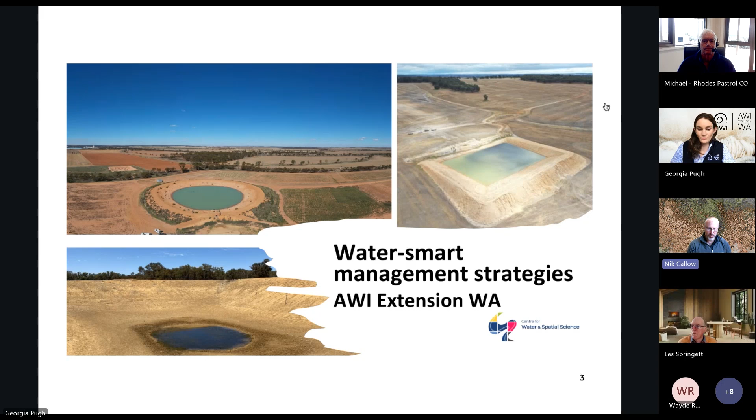So we'll see if this slide projection moves. Basically I wanted to share with you some of the lessons and experiences that we've had out of this project called WaterSmart Dams, or WaterSmart Strategies. WaterSmart Dams was a collaborative project across a whole pile of different partners, trying to use the best bits of everyone's skill set. So my team at the university handled some of the monitoring, the R&D, and building some of these water planning tools, the Grower Group Alliance liaised with some of the grower groups, and awesome people like Wayde, who were generous enough to lend us one of his dams to experiment on and host some of the demonstration sites.

And what we were really trying to do with this project is not muck around in the laboratories at the university, but build things at scale of adoption on farms in real systems, try them. Don't believe the manufacturer's numbers, because none of our numbers looked anything like what the manufacturers say things do in the field. So that's a useful lesson, but probably not that surprising to anyone.

We also had other parts of this program that people may be interested in finding more information about, which we call the broader WaterSmart Farms. So this bit is the Smart Dams component, but there was also another component looking at improving groundwater targeting and also micro on-farm desalination. And there's some good resources that you can find on some of that.

And I guess if there's one thing to say about some of the things I'm going to talk about today, they might be right for some people and might be water security options that are right for your farm business, but they won't be right for everyone. It's about looking at the nature of your business, how much water you need, what sort of qualities of water you need, your appetite for risk, your appetite for capital expenditure, and then coming to some conclusions. So that micro on-farm desalination stuff is another really nice part of the puzzle.

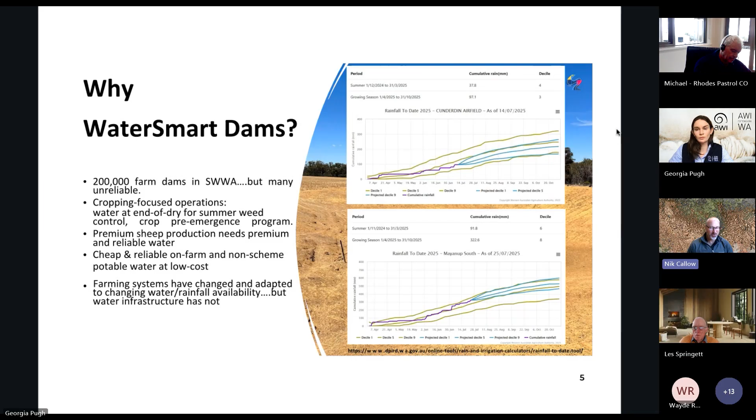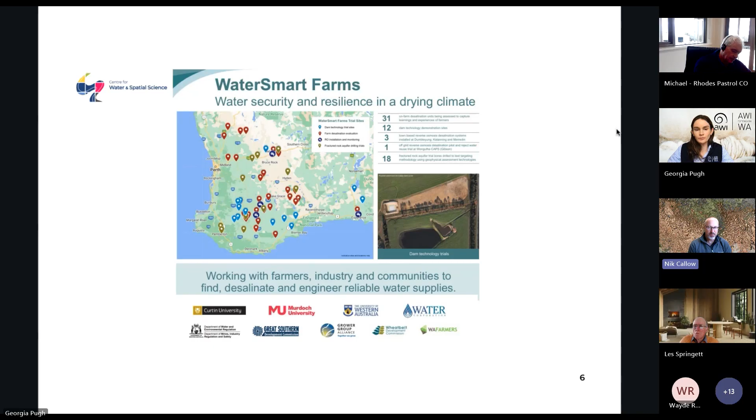There's a whole series of demonstration sites that were developed, and you can find more information if you're interested - look for the WaterSmart Dams project or WaterSmart Farms. Again, a whole pile of partners, things at scale, and a whole pile of really fantastic hosts who trialled different sorts of technologies.

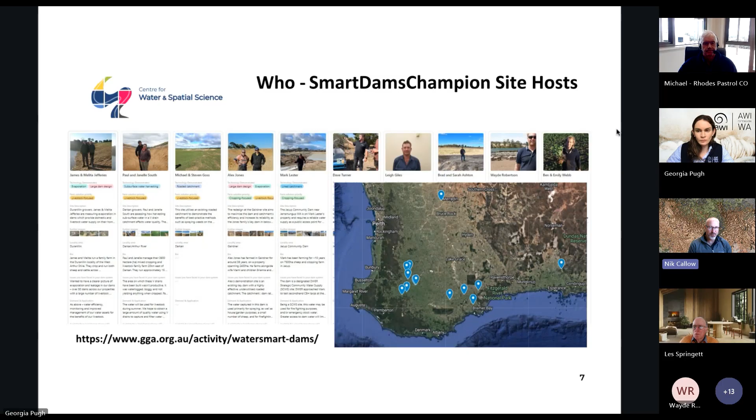We've got Wayde, who'll maybe share his thoughts on the floating cover he tried on his property. Really sort of learning those lessons together, which is what great projects are about, and also making sure things work - it's not just people dreaming up ideas and suggesting they're great when they just don't actually work.

So when we talk about water, we sort of break it into 4 key components: a focus on more runoff, so getting more water into dams; keeping the water in the dams; and a little bit of a focus on water quality, which we think is a really important part of the puzzle that maybe people aren't thinking about or valuing.

If you're shifting and evolving your business to looking at prime, high quality livestock production, that sort of system is going to work better, and you're going to get enhanced weight gain and productivity benefits from using higher quality water. That's a really key message - not just valuing that I've got some water on my property.

We see people who are sitting there at the end of, say, trying to get their pre-emergent program in - they're just relying on all the carryover water they've got on the farm, but they're using really specific, high cost chemicals as part of a mixed farming operation. Equally, livestock just hanging on to the last bits of water, it's not going to be good for them. So the right quality of water is an important part of the puzzle - it's not just a quantity story.

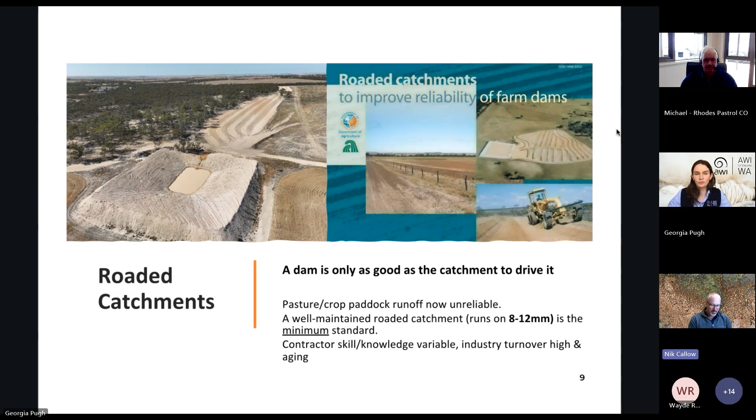Getting this water infrastructure built, laying your hands on well-trained contractors who can do this work, or people who are doing it themselves. We have lost a lot of people out of the industry. They've tended to go and operate machinery in the mining industry, which is a challenge. So we really need better design, but a strong focus or better focus on getting that catchment component working.

Also trialled some more novel methods. So this one was a repurposed grain tarpaulin. These were trying to target much lower thresholds of rainfall. The roaded catchment I was just talking about is that 8 to 12 millimetre per day to trigger runoff. Whereas this one here, site down near Jacup along the south coast of WA, starts to run after about 0.8 of a millimetre.

We had another one that we trialled in association with SEPWA out near Esperance, and again about that millimetre of rainfall. And what's really significant here is being able to capture this additional rainfall. A huge amount of our rainfall is those small to medium rainfall days where we might get 5 to 10 mils of rain, keeps the crops ticking along. But from a runoff perspective, in a conventional farming system, you don't really capture much runoff. You're just waiting for those 15, 20, 25 mil in a day rainfall events. And sometimes they just don't come along.

So the site that we ran at Esperance, I think the highest rainfall day that they had over the 2 years we were running there was about 18 mils. So a conventional system relying on runoff from paddocks, zero runoff, zero water, whereas these high-performing catchments are one way to run. You don't have to necessarily go with this technology. We'd also steer people, rather than going for the repurposed tarps, to dedicated surfaces. Obviously they've got to be well fenced out. You've got to keep the livestock off them to optimise the life.

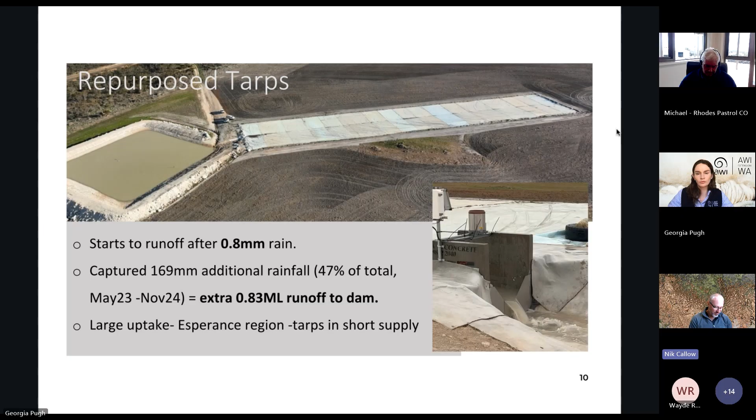And there are some significant costs, but we have seen examples of people adopting these, building fully lined catchments into fully lined dams, and then they're operating with pure rainwater. And their comment is that it's not necessarily just a water quantity game. Their performance in crop spray, in herbicide resistance, in ryegrass knockdown is totally transformative to their business. So using water that's never touched a grain of dirt, pure tap water, which is exactly what those chemicals have been developed in laboratories to use, has been a key part of how they've evolved their thinking about water security on the farming operation.

So here's the example at the Wandell's property out near Mount Ridley, about an hour east and north of Esperance. You can see here the proportion of rainfall. With the conventional system, 0% of the rainfall would have been captured from 25 mil. Roaded catchments, you're capturing somewhere in the order of 20 to 30% of the rainfall. Then you've also got to factor in the actual runoff coefficient is only about 30, 40, 50% of that rainfall. So if you've got 200 or 300 mils of annual rainfall, you're turning 10 to 15% of that into runoff on those sorts of systems.

Whereas the high performing systems, you can see the stats at that site, are capturing somewhere in the order of about 85% of the rainfall, much higher runoff coefficient as well. So they're a really good option that might be part of a solution for some people.

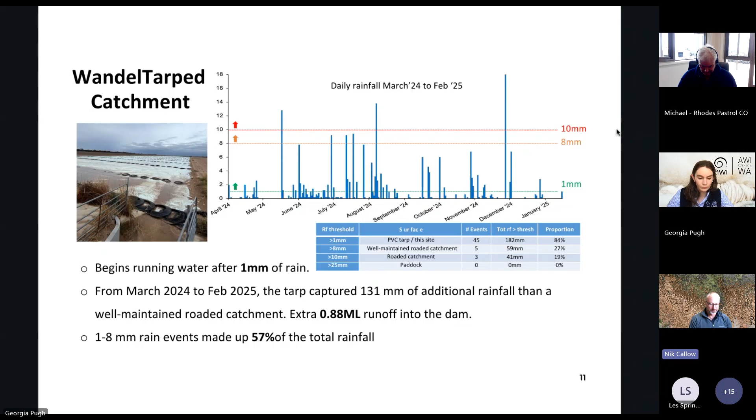This is one of the other trials that we ran with the Gosses down near Darkan area. So we had a look at some different road catchments here, some treatments here. So just like, you know, cleaning them up, getting rid of the weeds, giving them a bit of a roll, just tweaking and improving those runoff coefficients. Again, just slightly more performance out of those.

So again, these sorts of systems, just really getting them dialed in, getting them working as best you can, just capturing as much water as you can. So just emphasising, road catchments are great, but don't put them in and just forget about them for 10 or 15 years. They do need regular maintenance, and regular maintenance keeps them working in a much better sort of window and capturing more runoff. So it's really, really important to keep up to date with that.

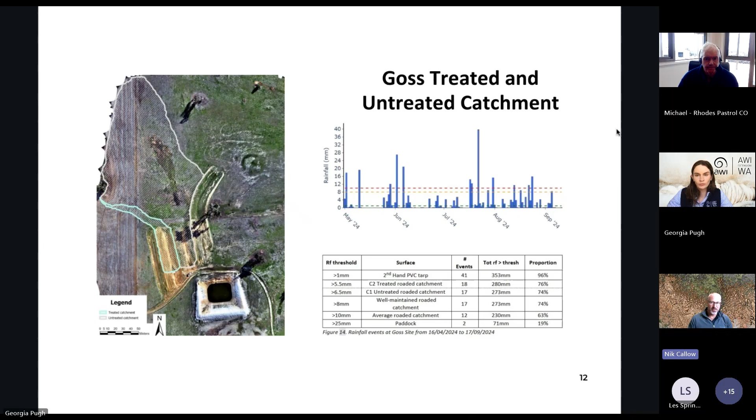Whoops, I'm going to advance slides with my keyboard again.

One of the other ones we looked at was subsurface drainage. So the idea here is some of the properties in the higher rainfall zones, some of the areas which are running much more intensive livestock or mixed farming operations. These areas particularly, so this was near Kojonup in these classic kind of duplex soils, really bad waterlogging problems. The fella here that hosted the site, Brad Ashton, couldn't really access a major part of his paddock. And so he was pretty keen on the subsurface drainage.

And what we were interested to do is try and just, can we take all of that water out of the paddock? And what sort of quality are we actually dealing with? And we were quite impressed, so we're deliberately quite high in the landscape here. We're definitely not doing this in low-lying areas, and no evidence of salt on the surface. But in this case, his drain had better drinking water in terms of salinity than my tap water in Perth. So that was a really good sign, really high quality water.

We are going to do a little bit of follow-up testing, hopefully this year. We've got a couple of sites that are starting to run off because we've had some good rains. So we do want to do a little bit of nutrient testing out of these, just to double check that we're not capturing a whole pile of nitrates and things like that in the water that might have some downstream effects on the system, particularly on livestock focused operations. So that's one of the things that we just want to track.

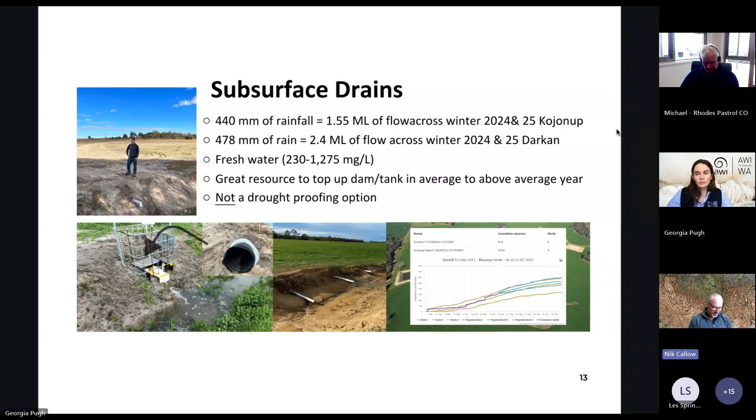Next one, we want to look at keeping water in dams and doing some work there, and included a bit of benchmarking. So just, how much water is being lost from dams due to evaporation and leakage. And basically across the sites, we looked at some different locations. But yeah, in the order of just over 1.5 metres of water being lost from the dams to evaporation, and then the leakage rates that we were seeing were in the order of maybe 0.5 metre through to 1 metre. So it's obviously very site dependent.

We did do some trials of some leakage polymers that are added to dams to try and clog them up. Unfortunately, the sheep decided to impact our monitoring and wrap all the water loggers around their feet and pull them out of the water, which didn't really help things.

So I can't really report back on the numbers from that. But yeah, anecdotally, it sort of seems to have had an impact. And some of the small amounts of data, which I don't really have enough confidence to present, do suggest that they had a significant effect.

When we look at the cost-benefit economics of water, actually treating leaky dams is pretty much the single cheapest way to get water. So maybe in the order of like 50 cents to $1 a kilolitre, which is certainly a hell of a lot cheaper than buying it and carting it from the scheme.

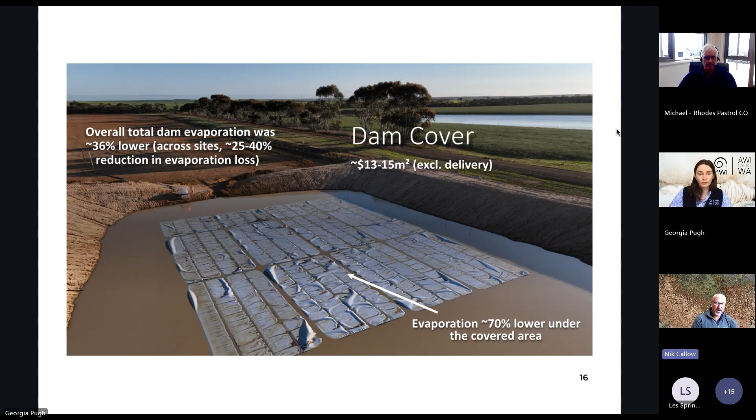And so by the time that you work out you can't cover the whole dam, you need them in the water, otherwise they can be susceptible to blowing up. So, most of the sites we were seeing somewhere in the order of a 25 to 40% reduction in evaporation, but that can be really quite significant, and that can be the difference between having and running out of water. Cost there, about $13 to $15 a square metre is what we paid for the trials.

This is Wayde's little wee dam. So we put out this about 180 square metre cover. It's about a 1.94 megalitre dam. You can see some of the results I've got there on the left hand side. So basically we've done some of the localized monitoring. We've also used regional weather stations and built some models of the evaporation processes, and then that allows us to investigate the difference with a cover and without the cover, and quantify these.

What does this mean overall? So if you look at it across the full year at this particular dam on this particular property, we've gone under the uncovered scenario of having in the order of... sorry, I've lost my place. So we've reduced the total evaporation pretty significantly. Really, if we look at that scenario, if we got that dam to 100% full, by the end of the following dry season we'd have a good couple of 100 kilolitres of extra water within that system.

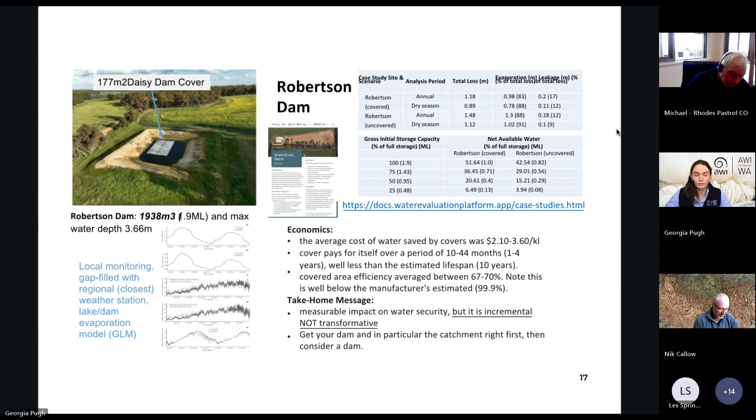Just sort of go through. So one of the other things we looked at was also just evaporation from vegetation-covered dams. So they can offer a whole pile of benefits. So, a lot of vegetation filtering of the inflows, much higher water quality. In this case, the evaporative losses are around about 28 to 32% less, and that's a story of reducing the wind across the dam. So they remain a really good option.

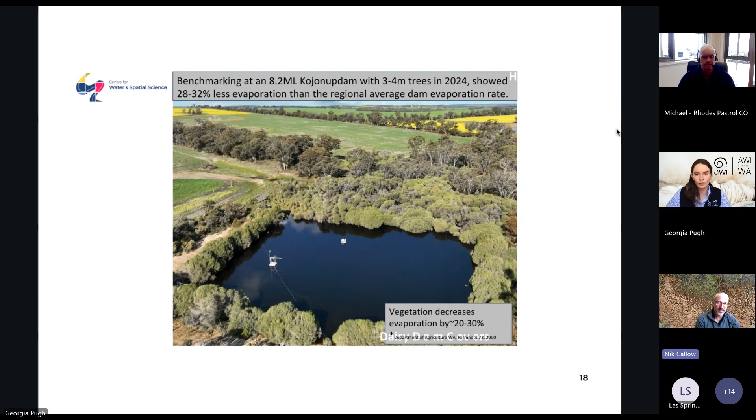Seems to be still a lot of hesitancy about integrating vegetation in dams. Certainly this one, the leakage rates were incredibly low. It's a really nice dam site on some really nice sort of clay that's really well sealed. But the combination of all of those paperbarks around that dam were really effective in being a pretty low cost way to keep some more water in the system.

The last one I'll sort of flag pretty quickly is just some of the water quality sampling. So we did some of this work to just get a sense of what sort of water qualities are out there, looked at sort of bore water, dam water, rainwater, but also scheme water. This one was more focused. This was work that we did more around the Merredin area, and obviously people that are maybe a little bit more cropping focused in that neck of the woods.

But one of the things there, for example, was, from a cropping and spraying perspective, pH is pretty important on various sprays. So say, for example, glyphosate is a weak acid. It doesn't want a really alkaline base water to start with. But for example, the scheme water in some of the areas that we sampled, where we've got water sitting around either in concrete pipes or in some cases on farms in concrete tanks for long periods of time.

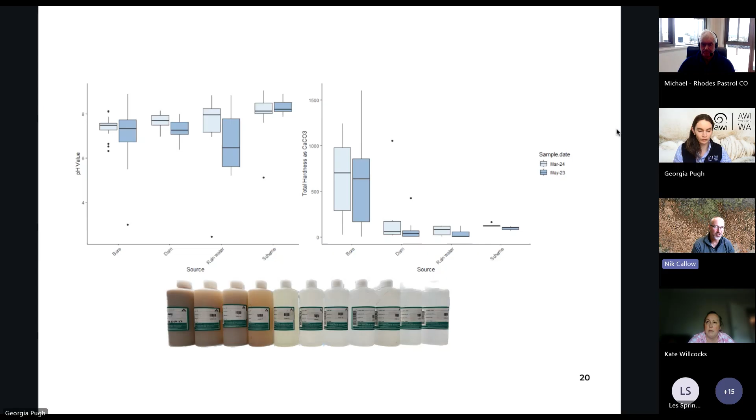So you want to be a little bit careful with some of that, and obviously doing a lot of water quality measurements before you put that 99% of what goes into your spray tank in. That's an important part of what gets used in that system. And equally, these base parameters, salinity and those sorts of things for livestock, and/or considering things like strategies to reduce the E. coli load and things like that.

A little sort of shout out to one of the things that some of the researchers have been working on here that we're also keen on. So this was some work that we did using artificial intelligence and satellites. So this was tried on the Kojonup local government area. So we're actually going into satellites and measuring farm water supply, or sort of the total area of farm dams, and we show some really good data in terms of being able to track regional water trends and things like that.

So we're really keen to sort of be able to do that, to maybe provide that as a bit of a tool, one, to people on farms to understand these more multi-year sorts of trends that we're seeing, and where you're standing with water quantity, although I think most people have got a pretty good understanding of that, but also being maybe able to feed that better into the policy space,

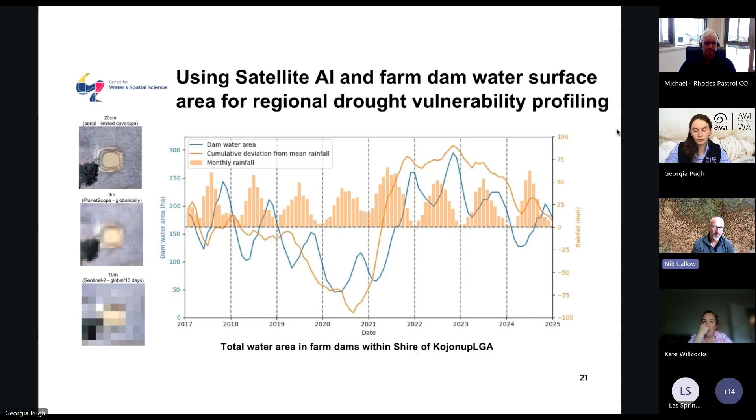to really emphasise some of these particular times when we do require government and policymakers to be probably a little bit more organised and ahead of the game, where we're better able to see some of these challenging seasons coming, and to be maybe slightly better equipped to not just be reactive, but to be a bit more proactive with some of these things.

Last one is this sort of pulling it all together. So this thing that we call the Water Evaluation Platform, or WEP. And that was about trying to pull a lot of the science and the understanding together into a single platform. So it was really based on a lot of the science that we did. It is there to predict water and water security, allows people to build a system around their own dam and farm,

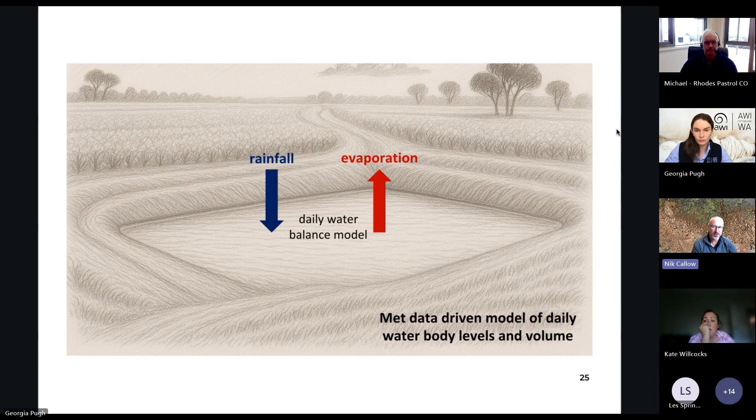and so things like how many livestock you're trying to support, or spraying, or other sorts of applications, whether you've got an existing dam and you're trying to find an optimal catchment size, or you're trying to design both from scratch. So there's a range of analysis tools within that we've tried to put together. It's based on this pretty simple water balance model that pulls in gridded meteorological data specific for your property. So you click on that and it pulls in the daily data. It looks at rainfall and evaporation.

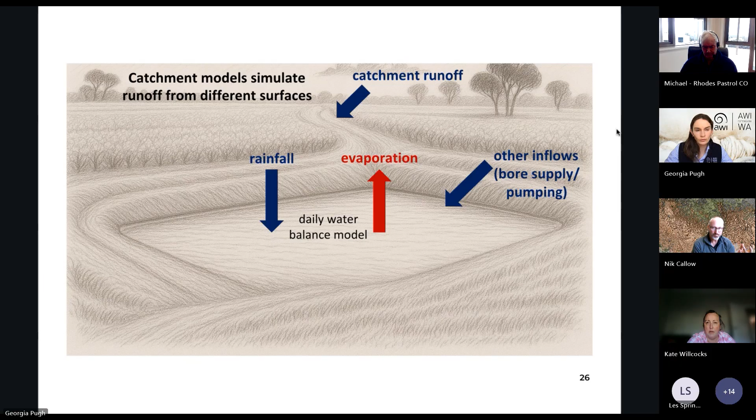It's got different sorts of catchments, and you can build multiple catchments within that, or even factoring if you're transferring water between the farm to some key dams and supporting them. And then it's got these demand functions, putting in things like, I'm trying to spray this many hectares at this many litres per hectare, or my specific livestock demand.

For the livestock demand, it actually pulls in the real climatology on the best available figures that we've got. You can also go in and customise a lot of these settings if you've got a better understanding of the demand that you've got, or other figures, you can customise a lot of those things.

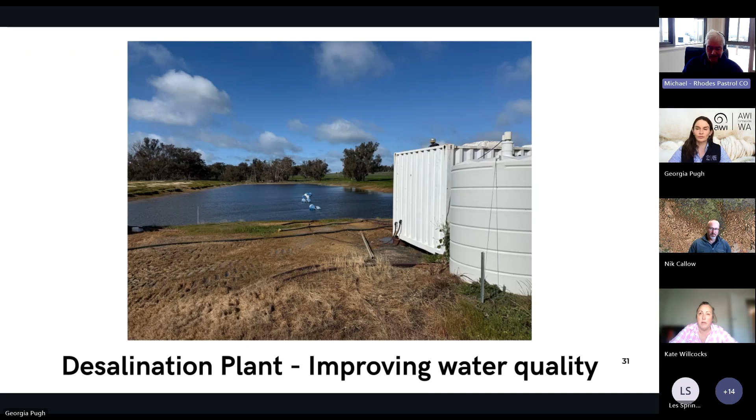17 years ago we built a desalination plant, in a sea container, bespoke, costing 350 grand to build. We can pick it up and shift it. It does between 30 and 40,000 litres of beautiful water, better than the Perth water Nick's drinking every day, when we run it for 12 hours. It's run by a 47 kVA generator. It's a pretty funky bit of kit, with a lot of computers. It's air conditioned, reverse osmosis basically.

That's really got us through some tough times, 10-12 years ago, when we were getting low on stock water, before we decided to do something about it and improve our dam systems and situation at Rhodes Pastoral. We were able to finish our lambs, cart water to cattle, or push water up to my wife's garden, which is pretty important.

This was built by a bloke - I won't say his name, but he's very good. He puts desalination units into boats, he's a really good operator. We thought long and hard about how to do it, and we can pick the whole system up and move it around if we have to, but it's basically been sat on that dam.

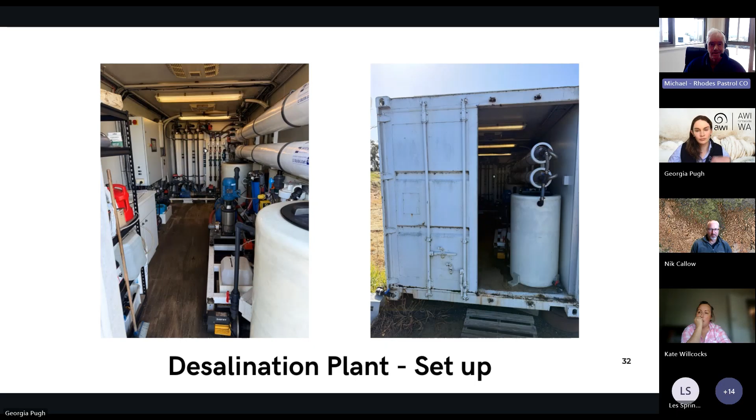I'll just go back to my pointer, that's just gone to sleep. Move. Oh. Go back.

Stock water is a really important thing, and you've got to have good clean water and good access to it. We spend a fair bit of time in our catchments each year. A lot of when we're spraying fire breaks, we make sure the guys are tidying up any roaded catchments that need cleaning. We've actually, over the last few years, realising that with the rainfall dropping off a bit, we've had to extend some of our catchments another 4 or 500 metres to keep those dams full too. So using a good contractor, someone who's au fait with fall of water.

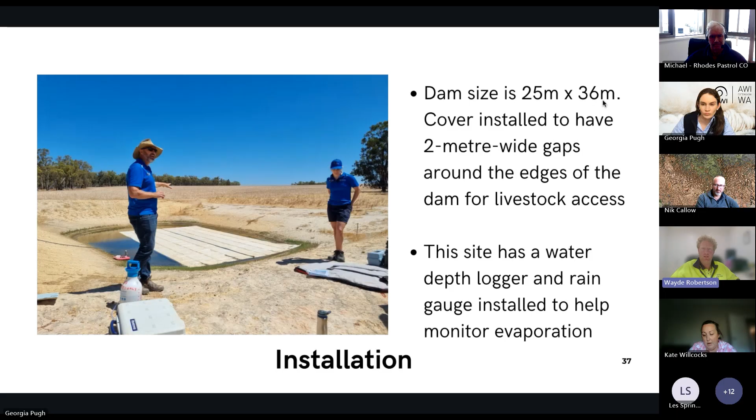So there's a few more photos of the cover when we installed it. Water quality wise, it's middle of the road, I think. Salt wise, it's very good, nothing special in there. Obviously with more and more crop in the paddock, we're finding a lot less runoff down into the dam.

I see the cover as very beneficial for a number of our dams. I think the bigger dams would be a bit tricky to manhandle and get the cover on. When we put this on, we had three of us there and it was quite easy, but a really big cover would certainly be a lot more tricky. I think it's a quick, easy solution. Cost-wise it's not too expensive, and you have the potential to pack it up and move it to another dam if you'd like.

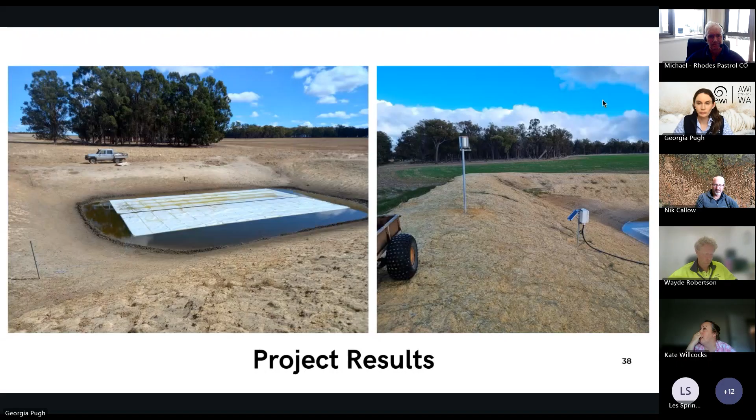So that's the cover for us. Going on a bit from what Nick was saying about subsurface drainage, we've done a little bit ourselves. We had a part in this WaterSmart Dams program, some stuff at Ben Webb's and, as Nick was saying, Brad Ashton's. So we've done a little bit ourselves, and we played around with a few different types of drains.

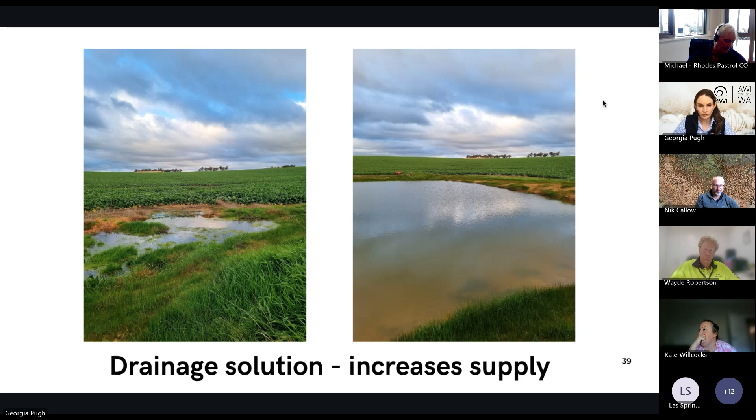This photo shows an end view of the trench coming out into an open drain. The photo on the left shows where the trench is. This area would never grow much, even in an average year - it would just get very waterlogged and always struggle. That's just a basic 300 mil wide trench with the gravel in it.

The interesting thing for us will be seeing how long these trenches last, whether they silt up over time and need to be replaced, and how long the piped ones will last as well.

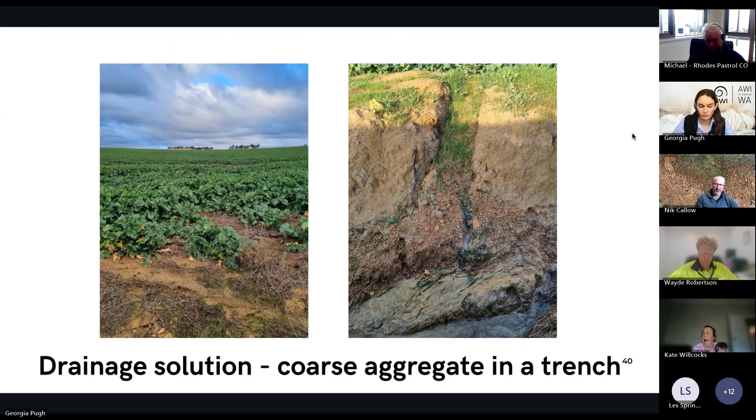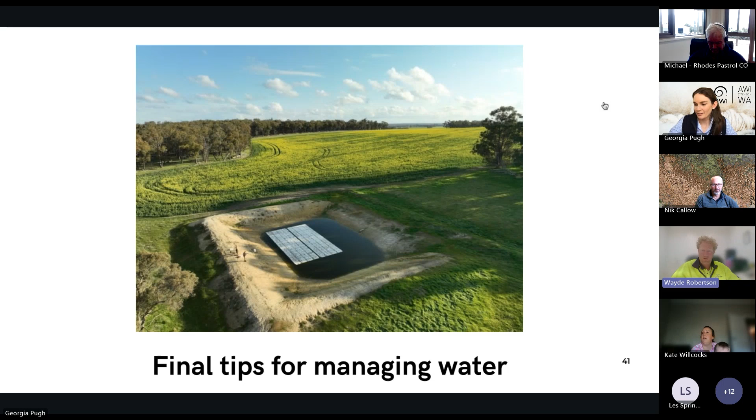But just to kick things off, Michael and Wayde, with respect to on-farm activities, when is the best time that you've found for your business to actually do some of these water improvement projects? I'll let you go first, Wayde. Well, I find for the covers thing, it's trial and error, I guess, seeing what dams are going to be the most beneficial for a cover, and a lot of us would know by now which dams are troubled dams. Catchment wise, best time to do it is before it rains. Get it done before it rains, so you're going to catch some water.

And Michael, just so that you come in on that as well. When's best for Rhodes Pastoral with respect to your yearly maintenance, or when do you find the time to look at these bigger projects with your water quality and increasing quantity? Yeah, at the moment, it's the best time to keep those catchments free of weeds. Probably end of January through to the first rains, as Wayde said, putting in your new dams or extending or putting new catchments in.